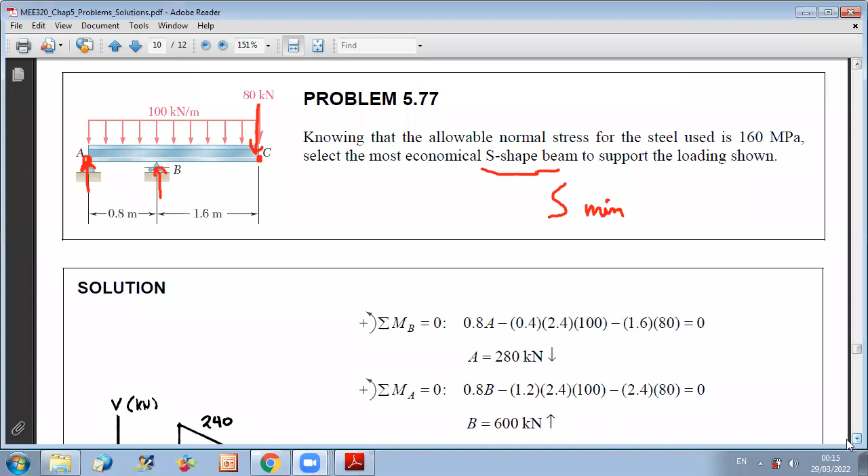Here you can see the shear diagram and also the bending moment diagram. So we start at A by 0 and we end up at C by 0 for the bending moment. Now, please try to practice with these diagrams to make sure you are able to get the actual values.

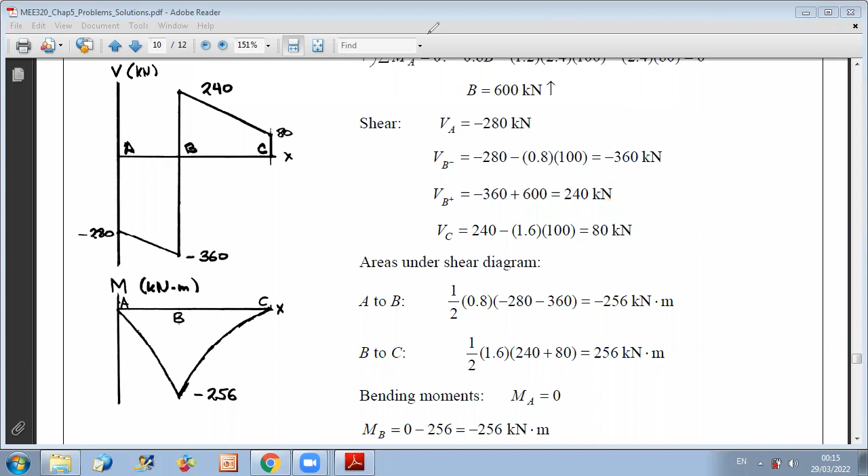Now we'll move to the design part. Once we get the shear and bending moment diagrams, as we discussed here, since we are dealing with an S shape, we have C1 equals C2, so we just consider the absolute value of the bending maximum moment, which is here 256. So we can now find the value of S minimum, since we have the bending maximum moment and the allowable stress.

We get that S minimum should be 1.6 times 10 to the power minus 3 meter cube, which is equal to 1,600 times 10 to the power 3 millimeter cube. And now I should go to Appendix C to select possibilities of standard beams for which S is larger than 1,600 times 10 to the power 3 millimeter.

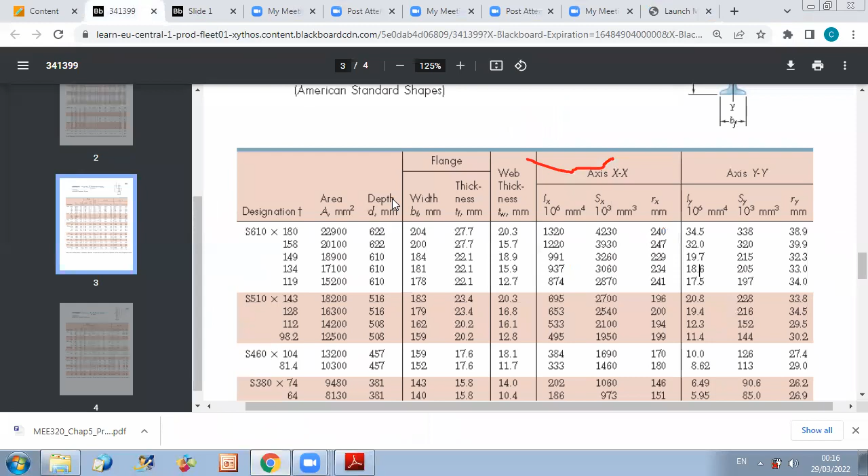Let us go to the appendix. If you look at your appendix, this is the first you go for S shapes, okay? And you check in your table here, you want Sx to be larger than 1,600. And you can find several possibilities.

Of course, you will select the one with the smallest cost. So already, all of these are already possible because S is larger than 1,600. You can go down to this level. Here you should stop, okay? So these are all possible cases, because if I continue below this value, I have then values of S smaller than 1,600.

So my first choice, okay, I can select 1,690. Why don't I say directly this is the actual value? Because as we said, we should try to select the one with the minimal cost. And the minimal cost corresponds to the minimal weight per unit length.

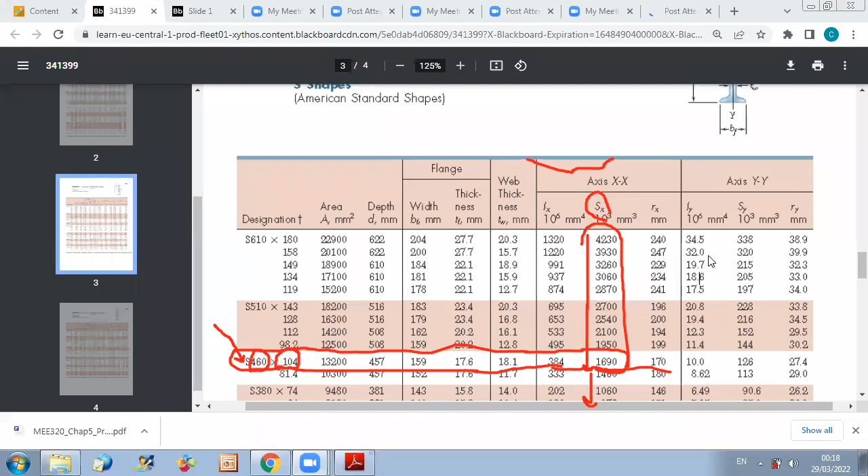If you remember when we talked about the way we name the beams, S the letter is for the shape, this is for the nominal depth in millimeter, and this is for the weight per unit length or mass per unit length. Okay, and you can check this always here. They will tell you how to name your beams. So according to American Standard Beam naming, we have letter S for the shape, followed by the nominal depth in millimeters and the mass in kilograms per meter.

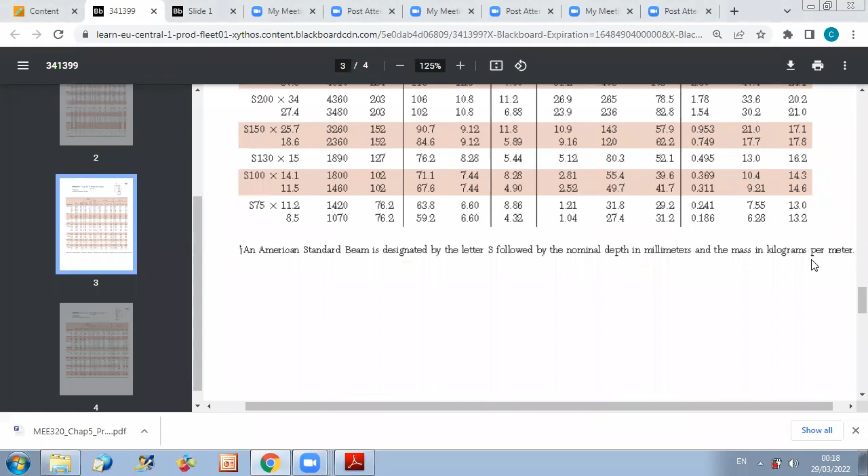So now, after the first criteria is to get S larger than 1,600, I should select between these the one with the smallest mass per unit length. So you should check this number, because this number represents the mass per unit length. As you can see, 104 is larger than 98.2. And 98.2 is the smallest number among all of these numbers. Okay, so I should select this value, because this is acceptable since S is larger than 1,600, but it is the best because it represents the smaller cost, since the mass per unit length is 98.2, which is the smallest possible value among the available choices.

Okay, so you can say that these are the two best choices, but between them I would select this one because the cost is the most important factor for me, after I ensure the safety. The safety is ensured by a value of S larger than 1,600, and then I can select the most economical type, which is S510 times 98. So this is the beam I will select.

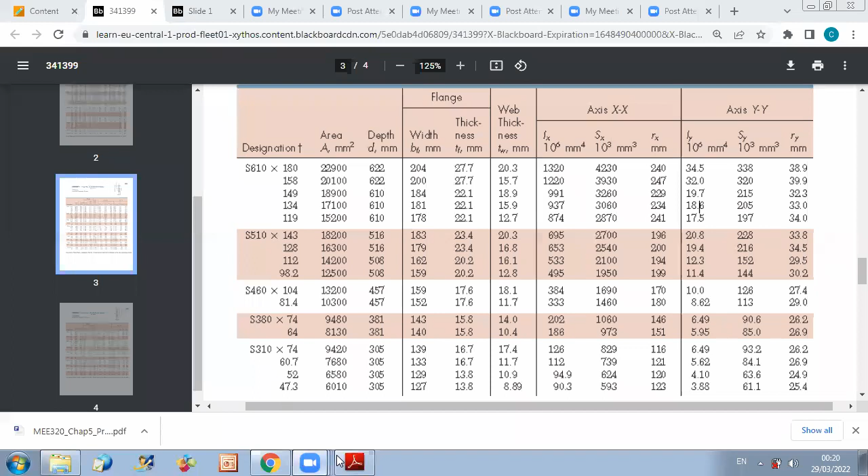So please pay attention in the selection. I don't have to be as close as possible to 1600. I just have to ensure that it's larger than 1600.

The most important criterion then will be that the weight per unit length, or the mass per unit length, is as small as possible. Of course, after satisfying this condition. Because these two satisfy the condition, I don't select the one closest to 1600. The most important criterion is the mass per unit length. This is the lightest, so it represents the smallest cost.

So on the economical level, this is my best choice because it satisfies the condition of non-failure, and at the same time it's the most economic.

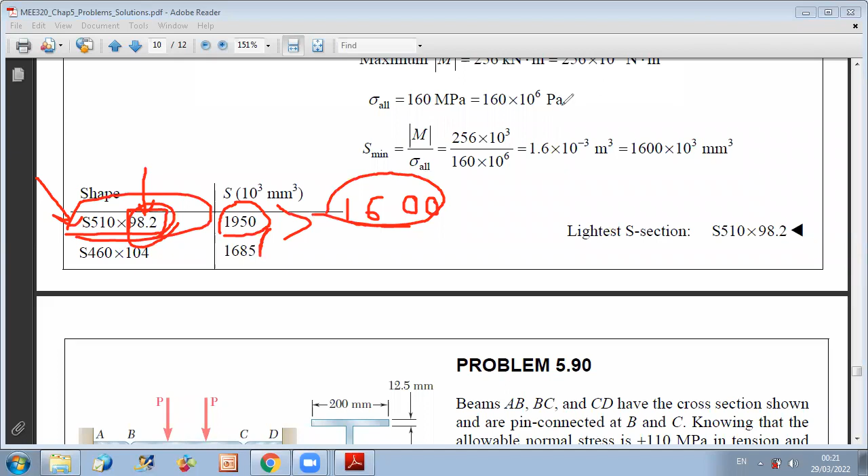Let us continue with design problems. In this problem, this is a very important problem where we have different cases to consider. This is what we were talking about when we have C1 different than C2. Until now, in all problems, we're considering symmetric cross sections, where C1 equals C2, equal to C. However, here you have a non-symmetrical cross section.

So you have a value for C1, a value for C2, plus also they gave you different allowable stresses for tension and compression. This will affect the choice of your permissible maximum bending moment. So we have in this problem beams AB, BC, and CD that have the cross section shown and are pin connected at B and C.

As we discussed together, whenever you have pin connected beams, so you have a hinge at B and a hinge at C. Bending moment at B should be 0 and bending moment at C should be 0, because we can consider that we have three parts connected together: AB, BC, and CD. And we know that at an extremity where we don't have a couple, or we don't have a reaction as fixity, then the bending moment equals 0.

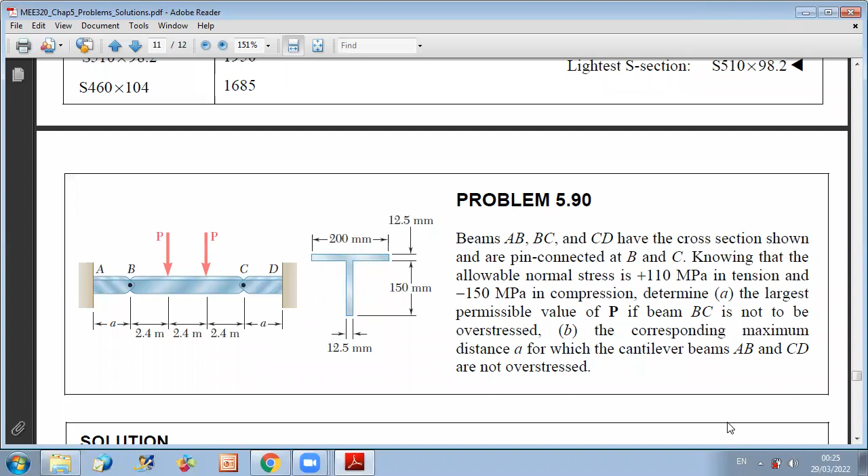This will help you in drawing the shear diagram and the bending moment diagram. To start with, as we discussed, we have a value of reaction at A equal to P, and at D also. So this is why, if you want to draw the shear diagram, we'll start with a positive jump at A, because it's an upward reaction equal to P.

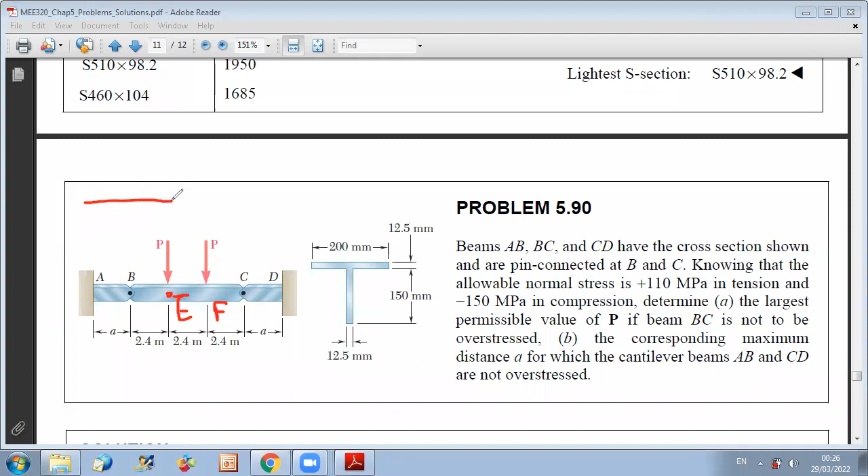Now, as we discussed before, any internal pin or hinge will not cause any jump in shear or any variation in shear, because by action-reaction, the effects will cancel out, and when you go from A to this point, you don't notice the presence of the hinge. So the shear will be constant from A to this point. If we call this point E, and this is F, from A to E, shear is equal to P. At E, you have a downward concentrated force equal to P, so you go down to 0. Between E and F, shear is 0.

Now, at F, you have a concentrated force that's negative, a downward force, so you have a negative jump. You will reach minus P and maintain this value until D. As expected, the upward reaction at D will bring your shear after D back to 0.

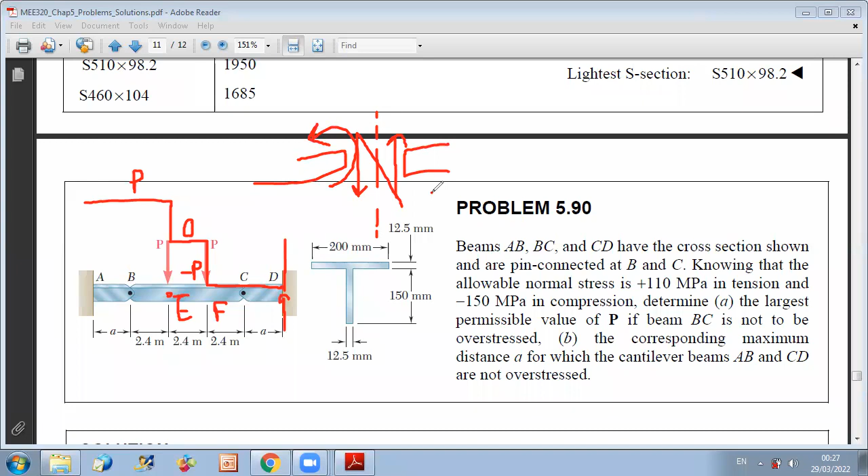Also a note: whenever you have symmetrical beams with symmetrical supports and symmetrical load, the shear will be anti-symmetrical, while the bending moment will be symmetrical, and you can observe this from your diagram. Why? Because whenever you take left and right parts, you can see the convention of V. If you put a mirror here, you have anti-symmetry about it for V. However, for the bending moment, you have symmetry.

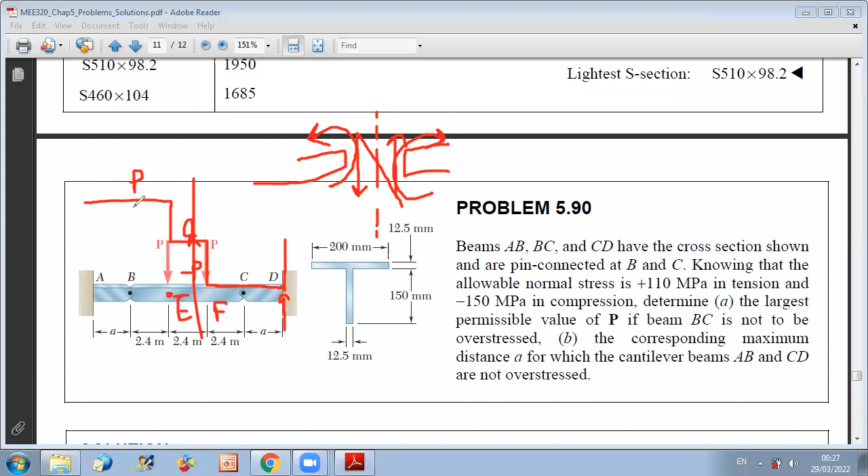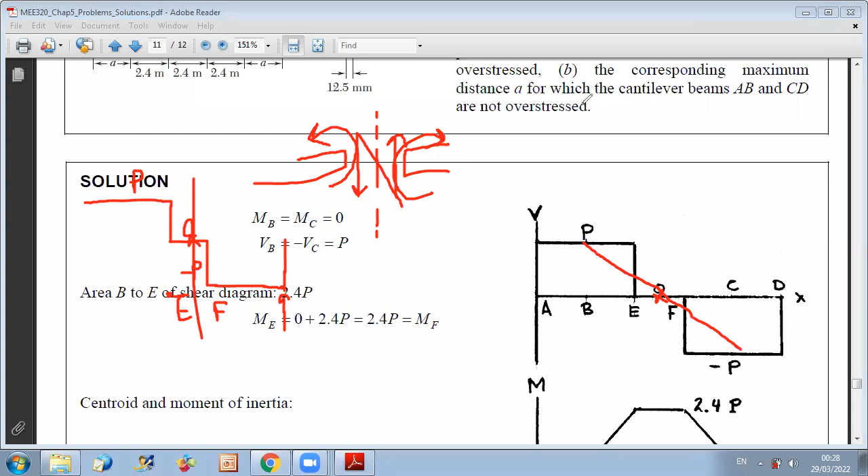This is why you get symmetrical behavior in bending moment, so you can just plot the bending moment until the middle and deduce the other part by symmetry. For the shear, you have symmetry with respect to a point, not an axis—it's anti-symmetry with respect to the axis, and symmetry with respect to the point. So if you draw the shear and bending moment diagrams, you can verify this: for V, you have symmetry about point O.

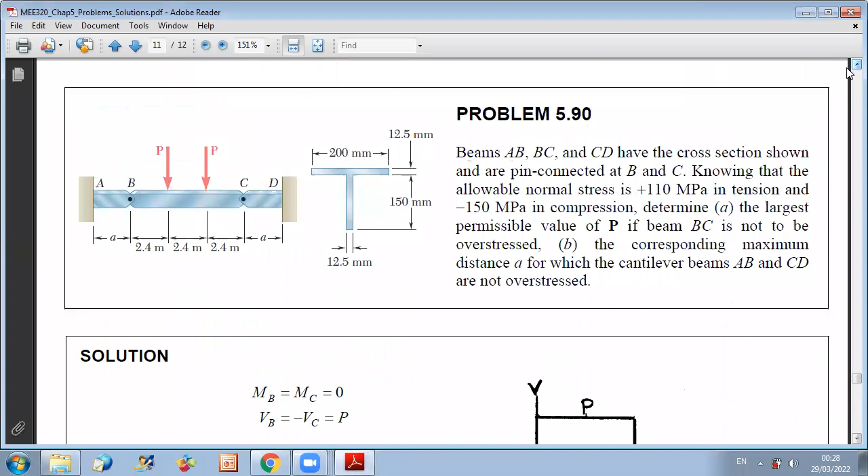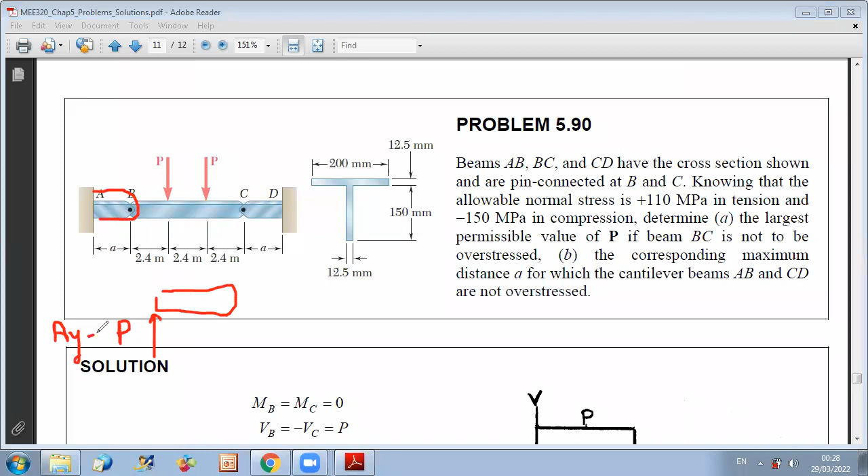And for bending moment, you can deduce your bending moment diagram from your shear diagram. First, since you have a fixity at both extremities, you expect that the bending moment will not start by 0. To get the value of the bending moment at A, do a section—consider part AB alone. If you take part AB alone, you already know that P is up here because AY equals P. And because when you treat part AB, this is an internal pin, you don't have a bending moment at B. M at B is 0.

So you can use the fact that the bending moment at B is 0 to get your reaction, your moment reaction at the fixity. To get the moment reaction at the fixity, you know that for this part of the beam, sum of forces equals 0. So at B, the reaction, or the shear, is downward, with a value equal to P.

Then to get the moment at the fixity, you say that sum of moments about A equals 0. If I consider counterclockwise as positive, I have plus MA minus P times this distance. This distance is A, so minus P times A equals 0. So the reaction moment at the fixity, MA, is equal to P times A.

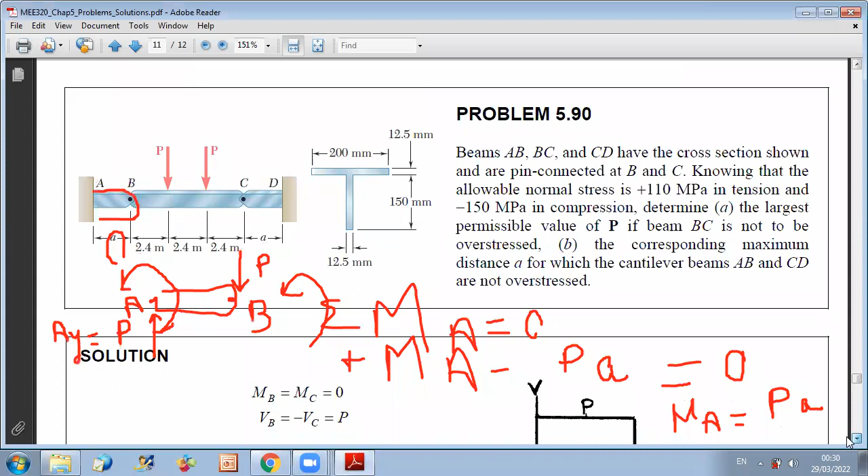Now, between B and C, if you want to draw the bending moment diagram variation, it's very simple—you can use the shear diagram because you already have the initial value of bending moment at A. The initial bending value, as discussed, is because the fixity moment—look, this is your fixity, and you have a counterclockwise moment at the fixity. We know that when we move from left to right, from A to D, and want to draw M as a function of X, a counterclockwise moment will cause a downward jump. This is why you start at A with a negative value of bending moment, which is minus P times A.

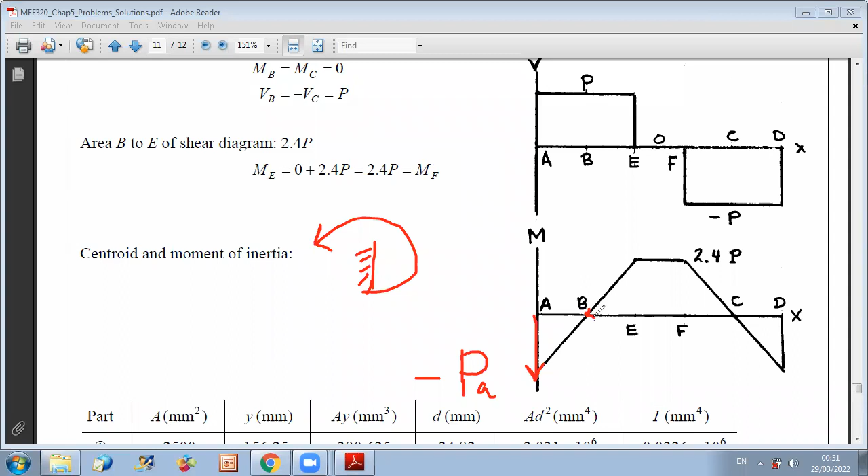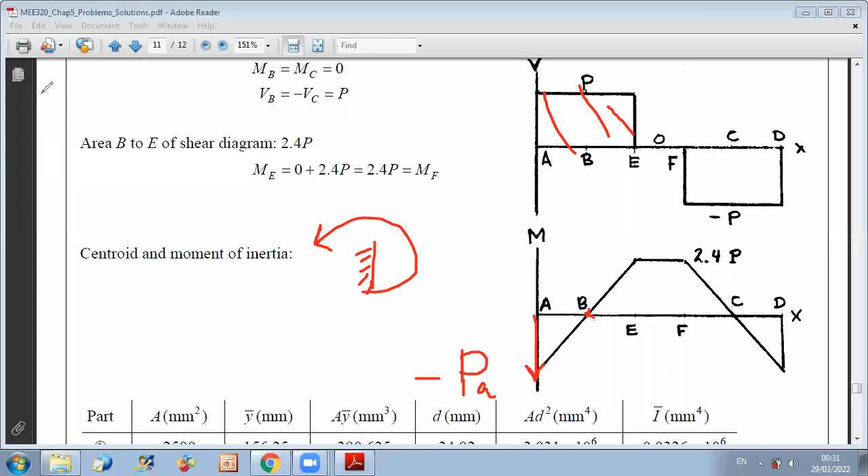Okay, now if you want to plot M, all you have to do is say that from A to E, as expected, I should have a bending moment at B of 0 because it's a hinge. And as I go from A to E, the increase in moment is equal to the area under this curve. We know that the distance from A to B is A.

And the distance from B to E is 2.4. So this part is A. So until here, as expected, the area is plus P times A. So we'll go to 0 at B, and from B to E, this distance is 2.4. So the increase of moment from B to E is P times 2.4. So you can say that the bending moment at E is equal to 2.4P.

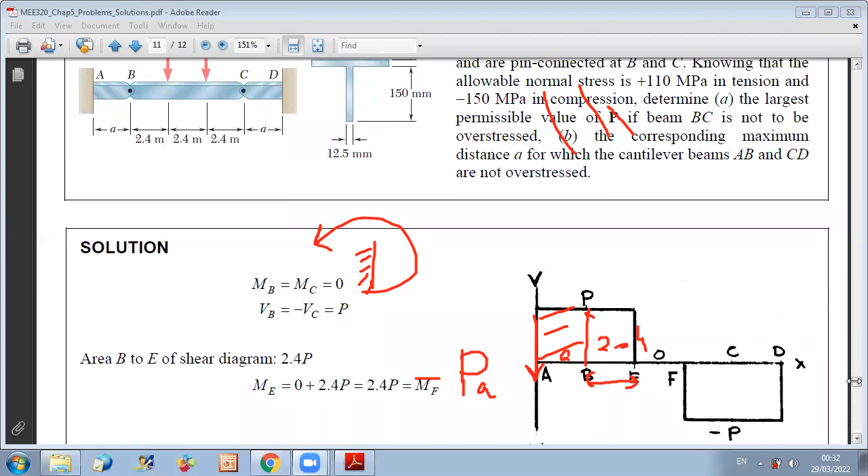And now from E to F, nothing will change because we don't have anything, so it's pure bending. If you remember the chapter on pure bending, between E and F, shear is 0, and you just have a constant bending moment. This is a pure bending application. So from E to F, it's 2.4P.

And now no need to continue, because as we discussed, the bending moment diagram is symmetrical with respect to the vertical axis of the beam. So here I can just consider that for the remaining part, I can exactly have the symmetry. So at this point, I have minus P times A, and that's it.

Now, what can I deduce from my bending moment diagram? From my bending moment diagram, I have a maximum positive moment of 2.4P and a maximum negative moment of P times A, and I want to design the system to not exceed the allowable stress.

Now, let us do the analysis of what is the maximum load P to be applied. Let us determine first what is C1, what is C2, and in the case of maximum positive moment, what is my corresponding value of bending stress applied, and the corresponding value P should have to not exceed this value of sigma. Okay, so first let us go back to our figure.

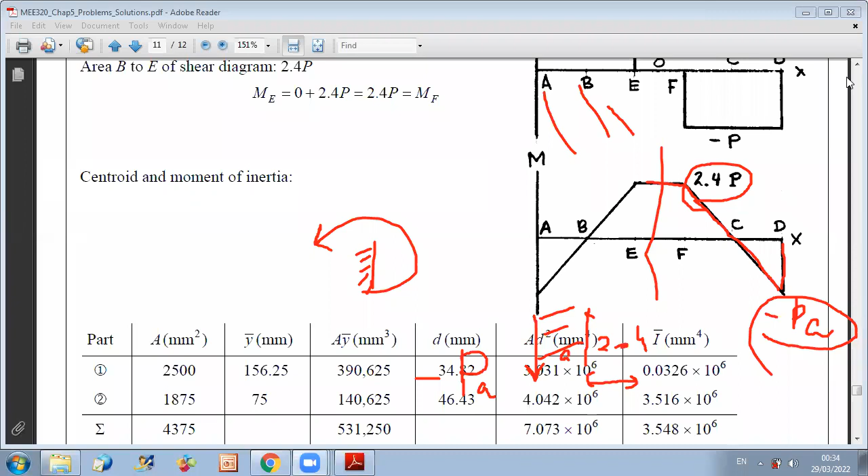As we discussed, top and bottom are not equidistant from the neutral axis because we don't have a symmetrical cross section. Whenever you don't have a symmetrical cross section, the procedure is to determine the location of the neutral axis. So if we go back to the previous chapter, we know how to detect the position of the neutral axis - it should pass through the centroid of the cross section.

So we make a table to determine the position of the centroid, and we consider that the centroid is determined as y centroid equals summation of ai*yi over ai. So here we can divide our cross section into two parts - this is part 1, and this is part 2.

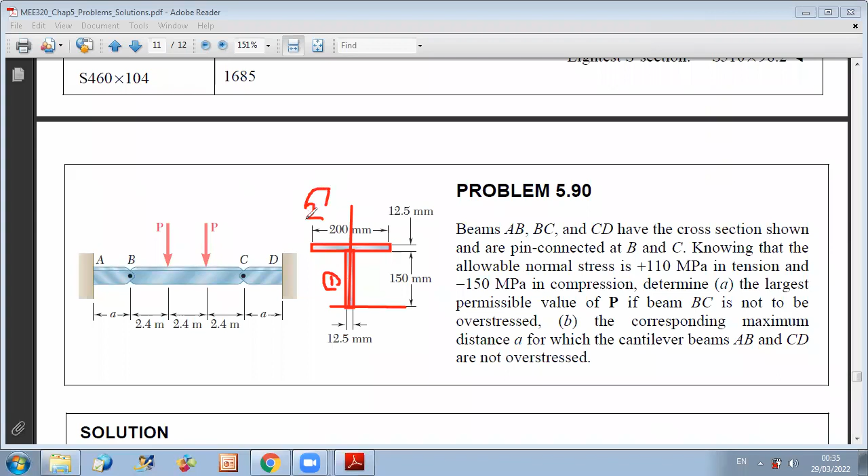Okay, and we can take this level as the origin reference, and this is y. So we have y1, y2, a1, a2. They are very simple to calculate - you have rectangles here. So let's say for a1, it's 12.5 times 150 millimeter, and y1 is at 150 over 2, which is 75 millimeter from the bottom level. And for the upper part, the area is 200 times 12.5, and the value of y2 is 150 plus 12.5 over 2.

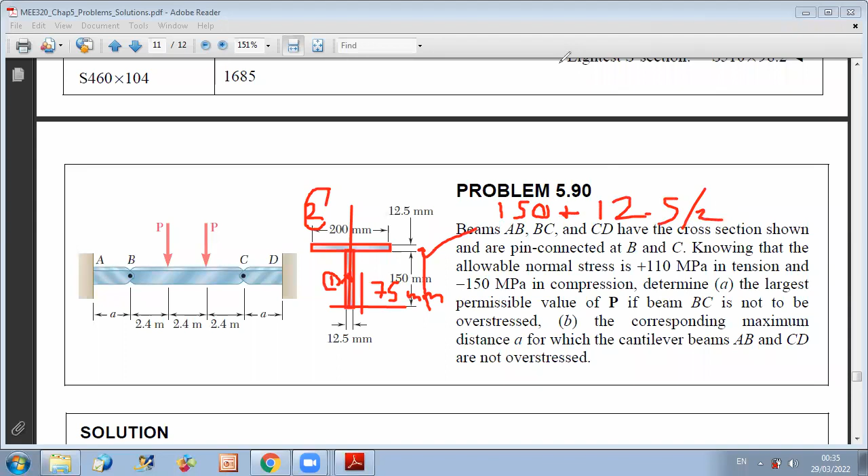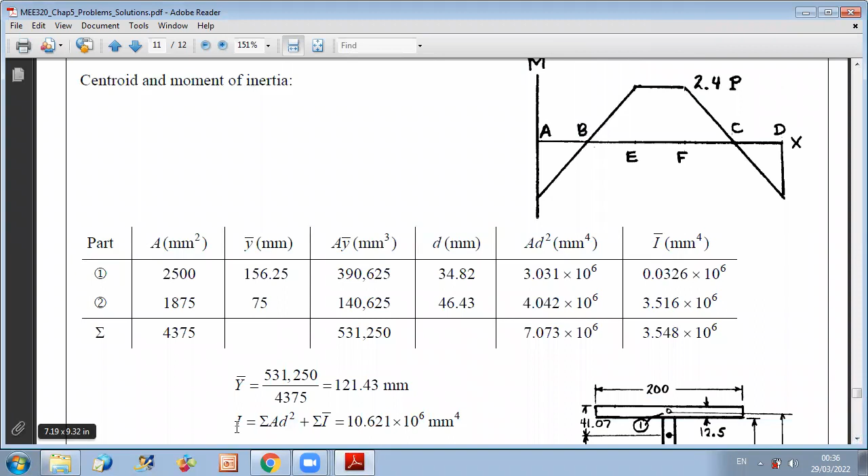Okay, so now we can determine the position of the neutral axis by getting y bar. And of course, don't forget to get the total inertia of your section about the neutral axis. You should apply the parallel axis theorem, because for each rectangle, you know the inertia about an axis passing through its centroid. And then because you want to convert back to the inertia about the neutral axis, you should find the distance between them.

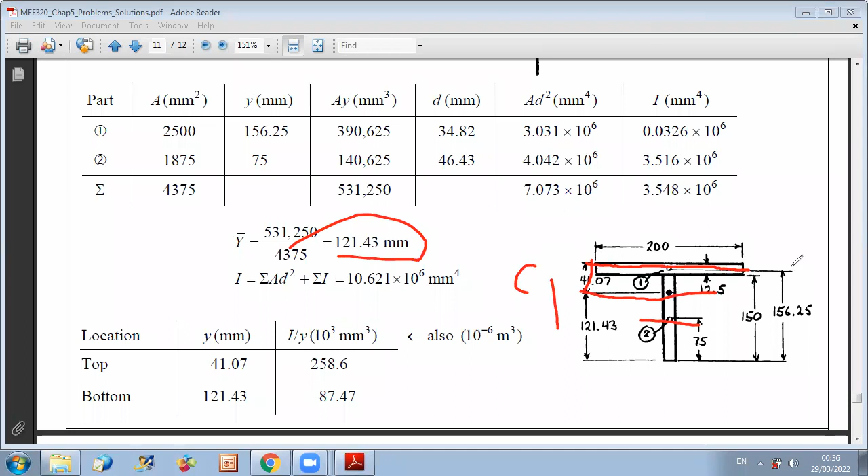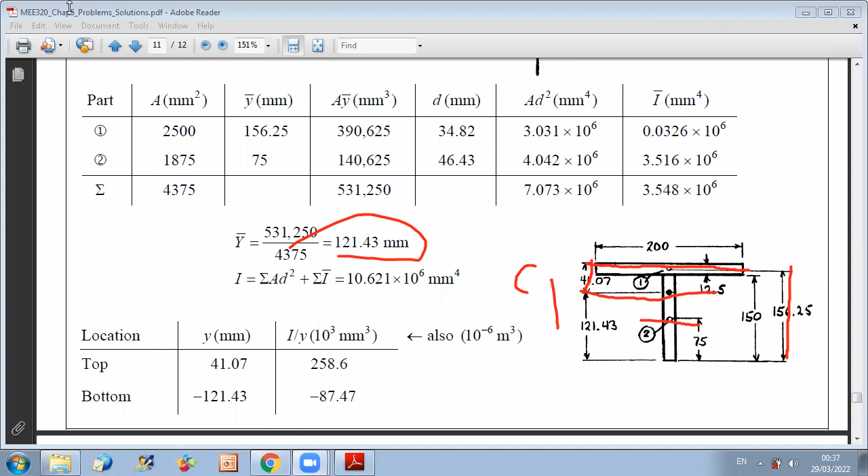So this neutral axis level was found at y bar equal to 121.43. So now you can consider what is y top and y bottom. C1 is equal to the total height that we have minus the position of the centroid. The total height, if you go back to the figure, is 150 plus 12.5. Let us go back to the figure - so the total height is 150 plus 12.5. You subtract y bar of the neutral axis from it, and you get C1.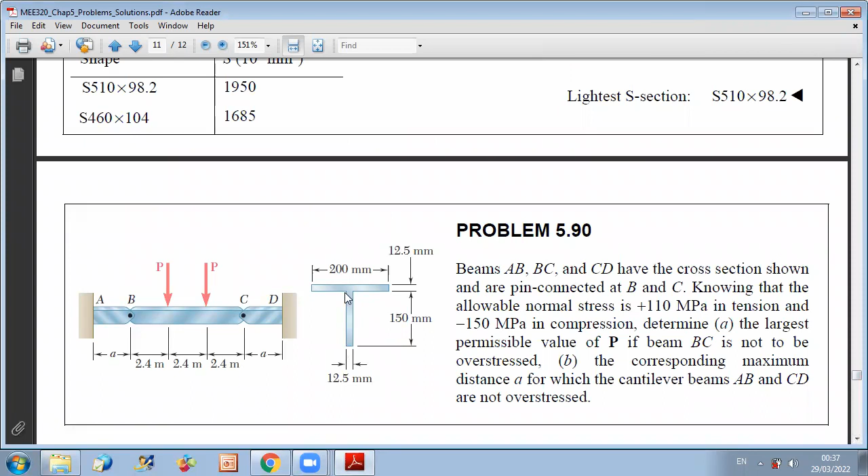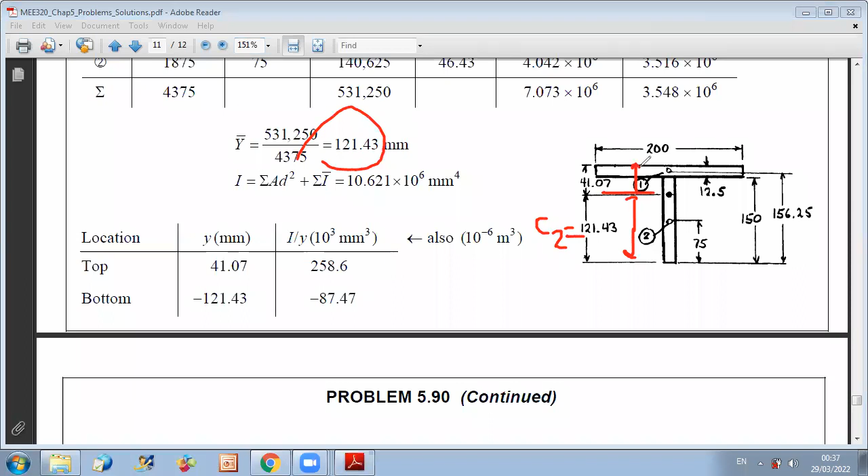And to find C2, C2 is simply y bar, because C2 represents the distance from the neutral axis to the bottom. So C2 is equal to y bar, which is 121.43, while C1, which is the top y, C1 is equal to 162.5, which is the total height, minus 121.43.

So you get this is equal to 41.07. Okay, so now you have the value of C1, C2, and you can calculate the total inertia of your section.

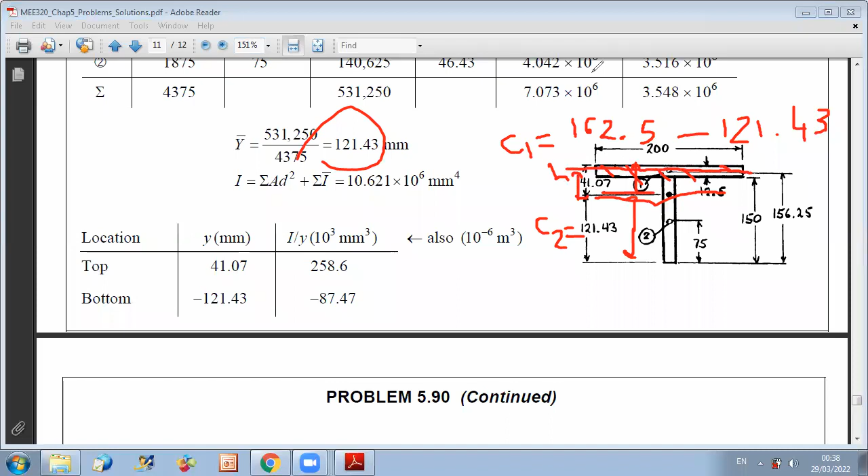The total inertia, of course, about the neutral axis. To do it, you already divided your section into two parts. For rectangle 1, you know the inertia about the axis passing by its centroid, and then you can determine what is the distance between this axis and the neutral axis. So to do it, you just have to...

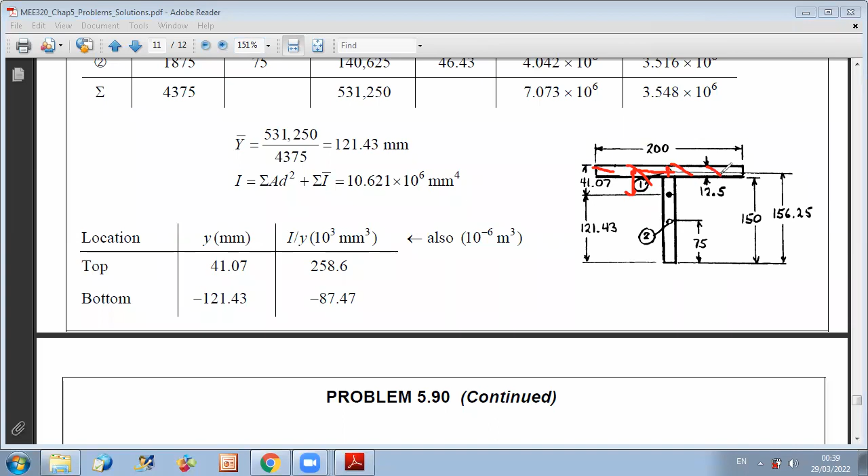Subtract from 41.07 this distance, which is 12.5 over 2. So the distance between the axis passing by the neutral axis and the axis passing by the centroid is 41.07 minus 12.5 over 2. And by applying the parallel axis theorem, you get the inertia of this part, which is bh cube over 12 plus A d1 square. Now you do the same for the second rectangle, and you add both inertias to get the total inertia of your section.

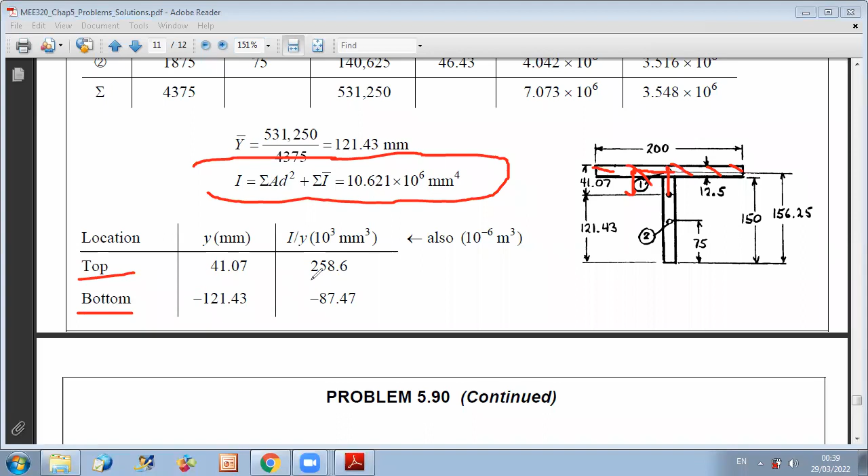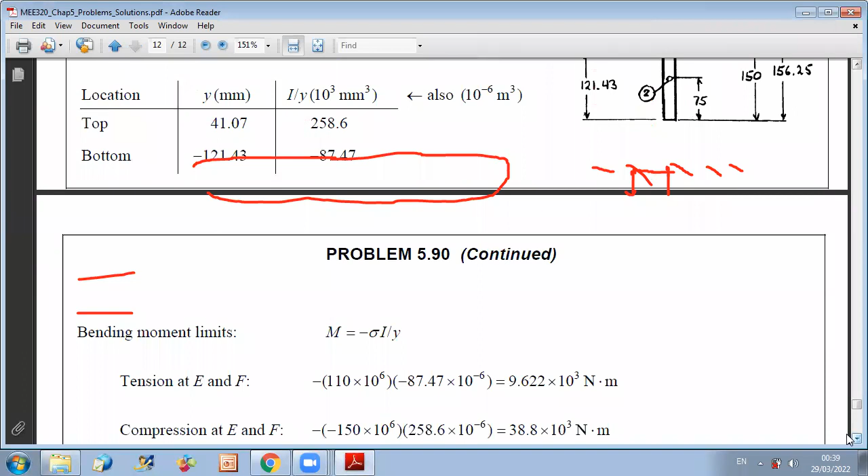And now you can calculate the value of I over y for the top and for the bottom. Both are of interest here because you have C1 different than C2, and you can do the calculation based on the most critical one. How to know which one is the most critical? Our purpose is to find what is the maximum allowable value of P to not exceed the stresses.

Now we know well that the bending moment limits are found by relating the bending moment to the allowable stress. We know that the maximum possible bending moment to be calculated is related to sigma times I over y. So now you have two values of I over y, one for the top, one for the bottom, and also you have two values of sigma, one for compression and one for tension.

And then if you do a small analysis, if you want, no need to calculate the four possible values, the four critical values of M. You can directly say, since I am interested in a limit, I want to find the limit of bending moment, and I have four critical values. What are the critical values?

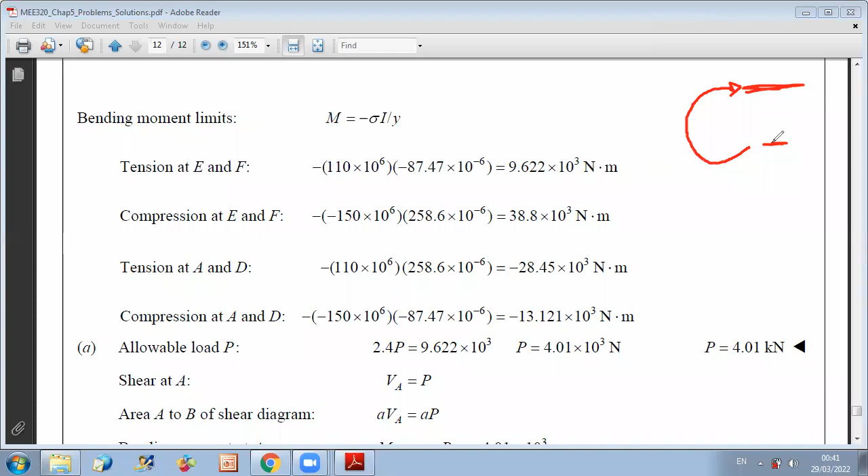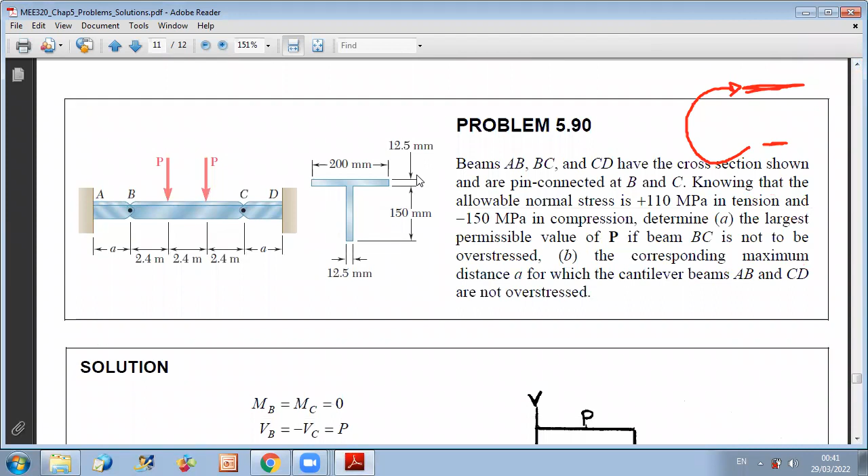First, if you have a positive bending moment, it will cause a compression of the upper part and the tension of the lower part. So if you go back to your figure, you have this is my top, this is my bottom, and points E and F correspond to maximum positive moment. So this is maximum positive.

And you have also a maximum negative moment, which has an absolute value equal to P times a.

Now, to start with, if I have a positive moment taking place at E and F, a positive moment will cause a compression of the upper part and tension of the lower part. So, and we know that for compression I use C1 here, for the top I use C1, for the bottom I use C2.

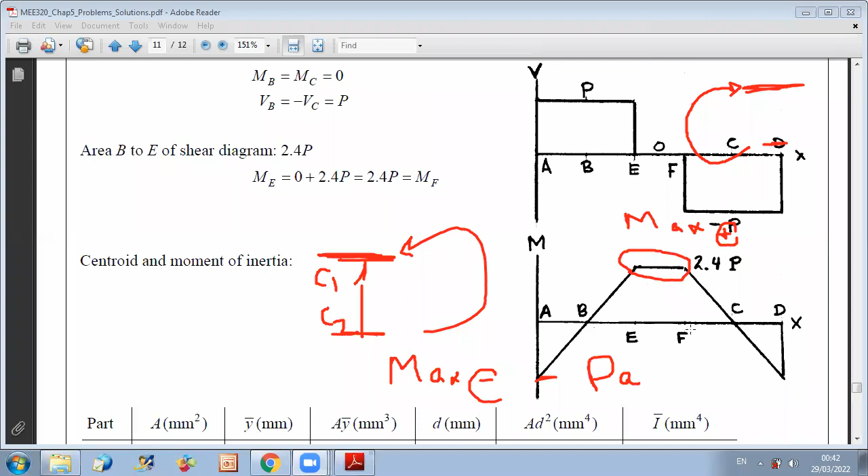So now when you take the case of maximum positive moment at E and F, you can get the values of maximum compression and maximum tension. So corresponding, whenever I have the maximum bending moment, I will have the corresponding tension at E and F that is allowable - you know that the tension limit is 110 - and whenever I'm dealing with a positive bending moment, then the lower part will be in tension. So I will take here at the bottom, what is the value of I over y, because as you can see here, I have two values, top and bottom.

Of course, you can say since I'm designing to find the critical value of moment, I should take the minimum between the different critical cases. Remember, when we have a maximum bending moment to not reach the compression allowable value, or maximum bending moment to not reach the tension allowable value, when I do the calculation, I select the smallest at the end. Here, this is what we will do - we'll do the calculation for the 4 critical cases and select the minimum.

If I do a small analysis, I can know which one will be the minimum. But let us now first do a typical study, find all critical values, and then select the minimum between these values. So how to think?

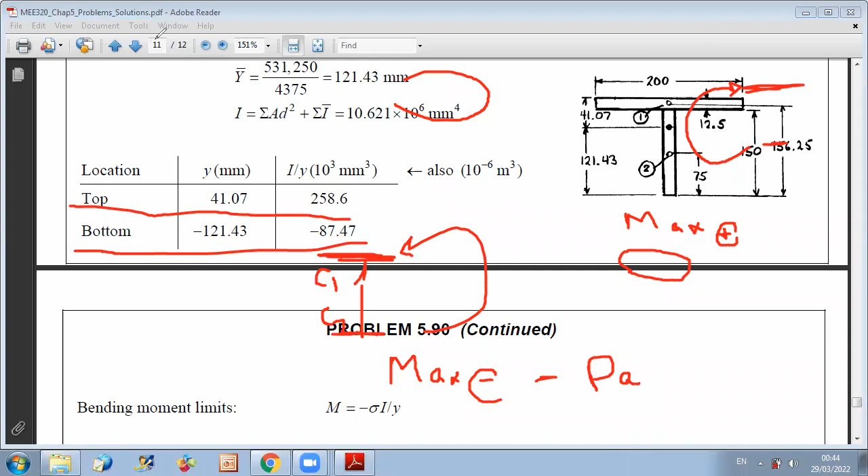We say that when I have a positive bending moment, the upper part will be compressed, the lower part will be in tension. So whenever I'm doing the analysis at points E and F where the bending moment is positive, I can say that top is in compression, bottom is in tension.

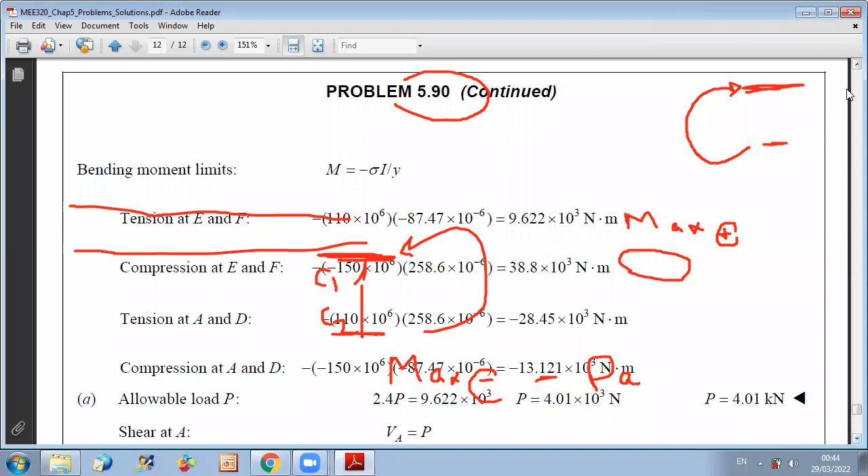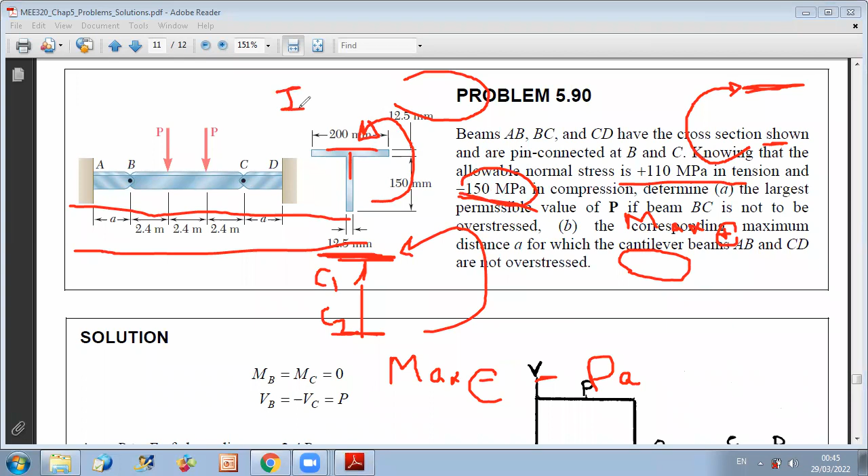So I will take the allowable limit of compression, which is 110... for tension you have 110 allowable stress, for compression you have minus 150. Since you are considering the case of a positive moment, the upper part is in compression, so you use the allowable compression stress, which is 150, with I over Y of top. And with the limit of tension, you use I over Y of bottom.

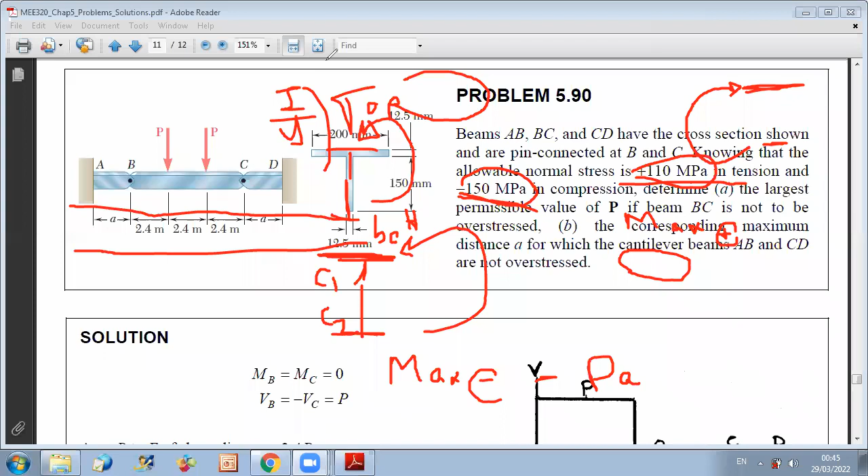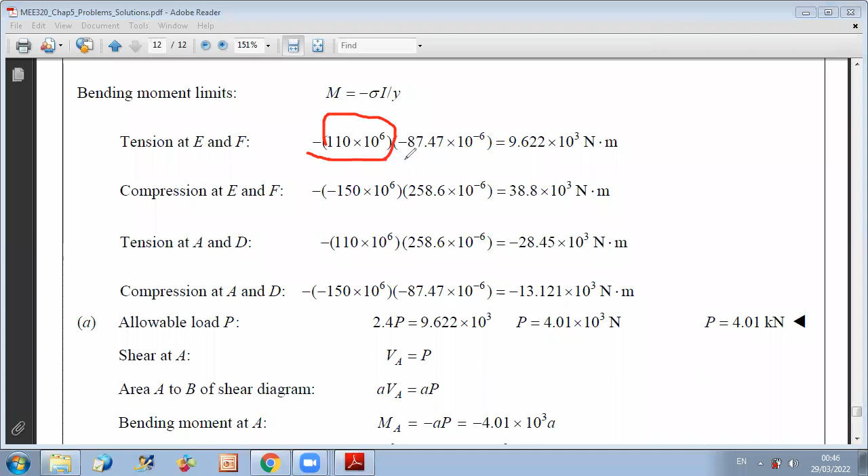This gives you two maximum values that the bending moment should not exceed. So if you go back to your calculation, whenever I'm considering maximum bending moment with the value of tension, the allowable stress not to exceed is 110 times 10 to the power 6, and tension is taking place at the bottom, so I consider I over Y at bottom level, and in this table I already calculated I over Y at bottom and I over Y at top.

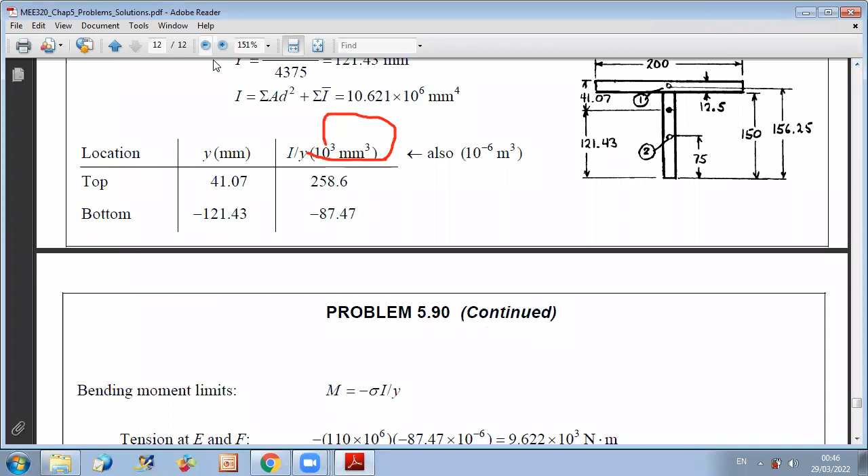So you can see here that I get a first critical moment. This is not to exceed the maximum allowable tension. So this is if you want M max to not exceed at points E and F, the maximum tension. And I have another value to not exceed the maximum compression, which is equal to sigma compression times I over Y at top. Of course here, you can directly know which one is more critical.

Why? Because the bending moment limit is equal to the product of sigma times I over Y. So in this case, the critical moment will of course be tension at E and F, because tension has the lowest allowable stress, and also it's occurring at the I over Y that is smaller, the smallest between the two, because C2, if you go back to the figure, Y represents C here, so tension is for C2 and compression is for C1. So you have that sigma tension in this problem is smaller than sigma compression.

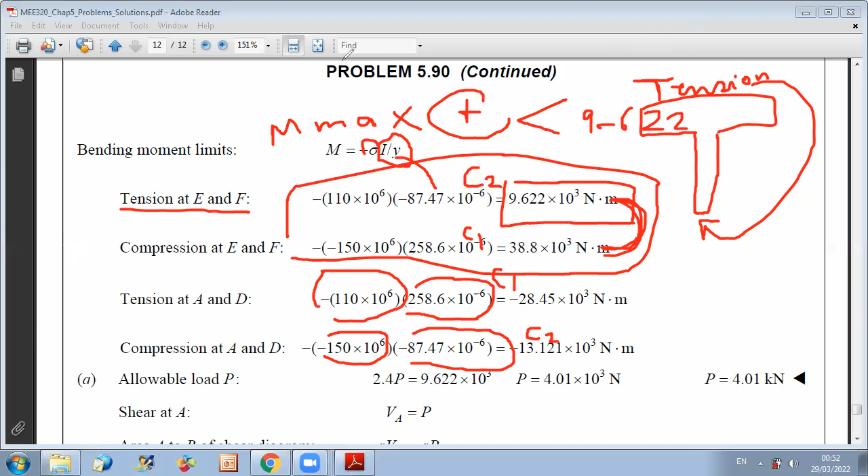Since you expressed your maximum positive bending moment as a function of P, if you go back to your shear and bending moment diagram, you can see that the maximum positive moment is equal to 2.4P, and 2.4P should be smaller than the value we found, 9 point something.

So when we did the analysis of maximum positive moment, we found two values for this maximum. We select the smallest, which corresponds here to 9 point something. Now you can find the maximal value of P to satisfy the first condition, that you are not exceeding the allowable stress of tension and compression for a positive bending moment.

Now for the negative bending moment, you have minus P times A. So already now P is imposed. Now you can design for A.

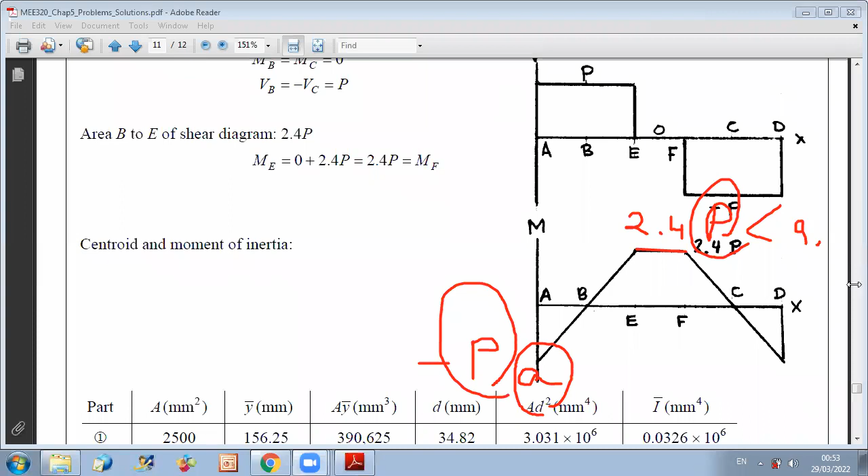You have that P times A should be smaller than, now you will select the most critical between the two cases here, which are when I have a negative moment. We said that we have tension at A and D, and compression. Tension at A and D will take place at the upper level. So you take here the first critical value of the bending moment as sigma tension times I over Y at the top level, because for a negative bending moment, the upper part will be in tension.

So to get the corresponding maximum moment in the negative case, I should multiply the tensile stress by I over Y at the top level, which is 258.6 times 10 to the minus 6, while for the compression I should take the allowable stress times the value of I over Y at the bottom, which is minus 87.47 times 10 to the minus 6. Here, you should do calculation.

You cannot predict which one will be more critical. Here, you could predict it because you have a smaller value of allowable tension compared to compression, and also here I over Y is smaller because you are having a larger C. So you can be sure that this is more critical.

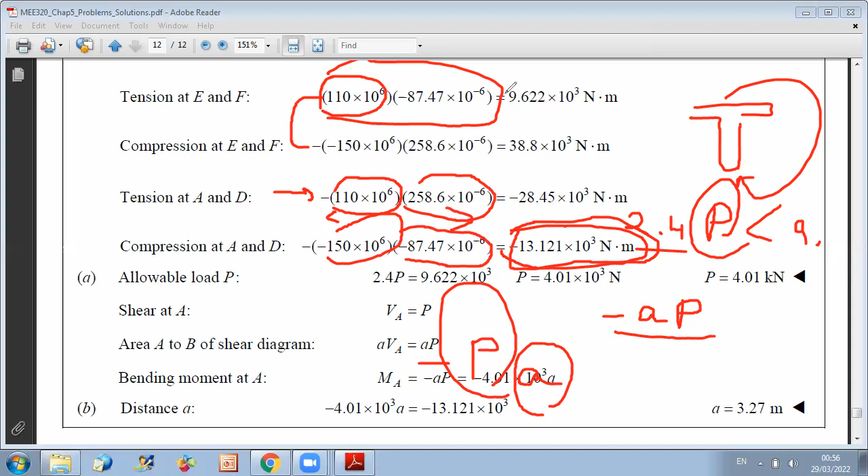And the value of P is already calculated from the previous step, so you can deduce what should be the value.